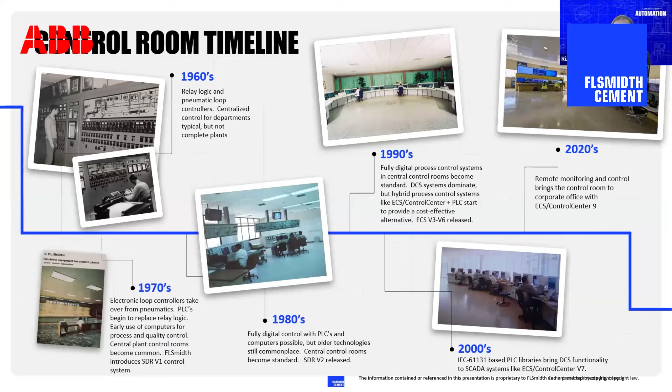So what is in it for us in Industry 4.0? We know that we need cost savings out of Industry 4.0. It's not just an implementation of some technologies, but what it can give and how the cement plant can benefit. The most important factor is cost saving, and quality must be improved. How can technology help improve quality, and how can we increase uptime, because even one unplanned shutdown can cost the plant a lot of money?

And it makes us less efficient. So we become more efficient by increasing uptime. Greater productivity is the most important thing: how to increase production with fewer resources than we have today. The ultimate aim is to reduce the environmental footprint. This is how the transformation from Industry 3.0 to 4.0 can happen, how these technologies can be adopted by the cement industry, and how we can help them adopt those technologies with ease. That's what the presentation is all about.

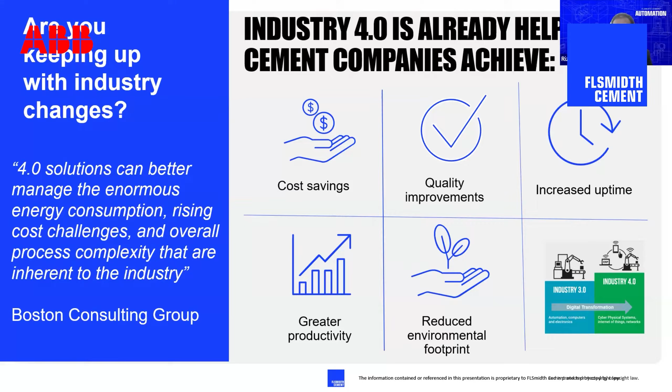For me, I've chosen two topics, production and efficiency. There are many tools available in the market, but we also need to set KPIs. If I'm looking at solutions in the market, what can they do for my plant? There has to be a KPI set, because I need to measure what I'm doing and how it is paying back to the cement plant. So there are some guidelines, like how my kiln production is going to improve, what fuel saving and what energy saving I'm talking about.

It can be to the specific areas. It could be VRM, it could be ball mill, it could be roller press, or it could also be kiln. But before we start the project, I think we need to have the KPI set, and then measure it against that.

Okay, this is the digital project I have implemented in my plant. Is it benefiting me? Are the returns what I'm looking for? How am I making progress on these returns, right? So that is the most important thing. So we set the guidelines, we set the KPIs, and then we start the digitalization projects in the cement plant.

So I've taken two topics, the two most important topics for any digitalization of the cement plant: the quality control and the optimization part of it. How they are linked, and how this can impact the whole cement process, right? The value chain is very important here when I'm talking about the quality control and the process optimization.

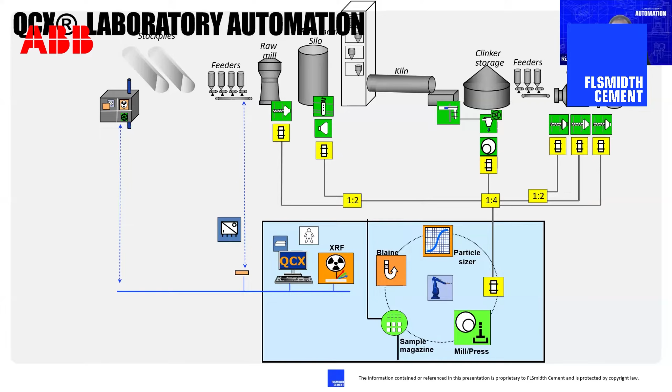So the QCX laboratory automation not only helps in having the right sample, but it also helps you with the safety part when it comes to the human, right? But where does the error come from? Is it from the sample collection, the sample preparation, or the analysis process? If you see the whole 100% chart, the sample collection is where the errors are happening, right? How the sample is collected, at what time it is collected, and how it is being processed.

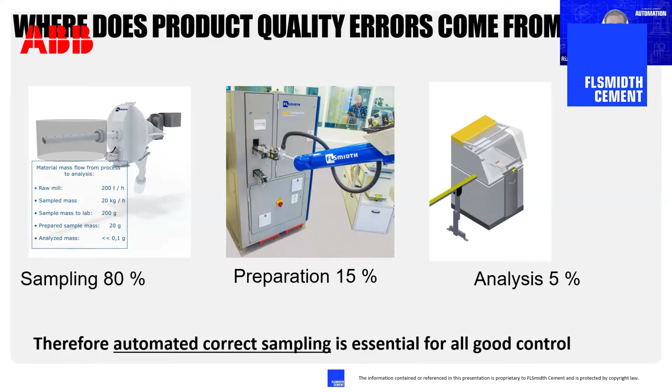So these are the important aspects of quality control, right? We invest a lot of money in the equipment, but if we don't have the right sample, then the whole process is not correct, right? To correct it, the sample is the point where it has to be automatically collected, and that's the reason why the QCX RoboLab plays a vital role when it comes to quality control.

Okay, now we have collected the sample. We also have the equipment invested to do the analysis. How to make auto correction, right? So it has to be in a closed loop. We have so many manual processes today. So as part of the digitalization, we need to make them automated, right? So the sample collection, then the analysis, and then the correction.

So once we have this analysis from the XRF or XRD, that has to be fed to software. That is where the QCX BlendExpert plays a vital role. It takes all those analyses and characteristics, and then the raw mix control is done automatically, right? Today these samples are collected manually, the analyses are done manually, and the feed set points are given manually. So if those ratio set points are corrected automatically, the quality part of it is done in a closed loop.

We know that the pyro process is critical, but what is feeding the pyro is the raw mix, right? If the raw mix is quality, then the output you get from the kiln is also quality, right? We keep doing the basic corrections in the kiln, but what we are feeding to the kiln is also most important, and that plays a vital role. So quality control is foremost if we really want to have an efficient kiln.

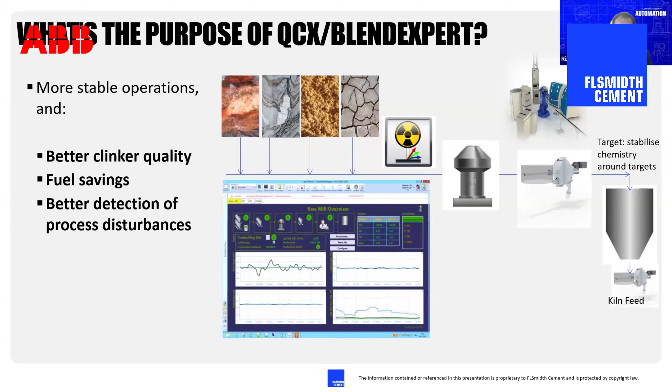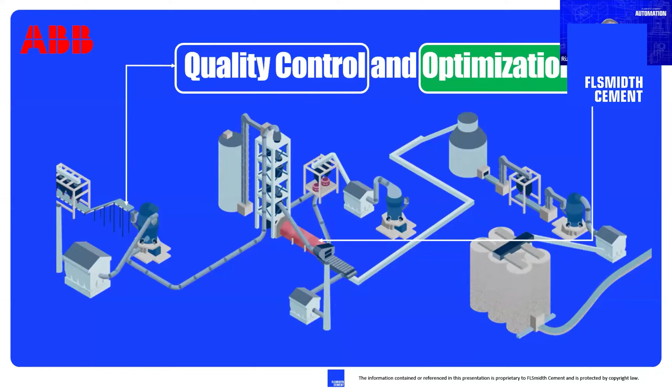So now I'm coming to the optimization part of it. Process optimization can never be avoided in today's date. With pyro being the critical part of the cement process, and having alternative fuel and WHRS as part of the pyro process, it makes it more critical in today's operation.

It is humanly impossible for an operator to run the cement plant efficiently, right? Yes, based on his experience, he can keep changing the set of parameters with the process changes, with alternate fuel, with the WHRS being placed. So the kiln has to be optimized, the kiln has to be efficient, but how much can the operator take, right?

So that is where the ECS/ProcessExpert, the advanced process control, helps the operator by becoming an assistant to the operator. It takes over from the operator, but I think you still need an operator. It will not replace the operator today, but that may happen in the future. As of today, you need an assistant to the operator, so the operator can work on other things, but changing the set point every second is humanly impossible.

So that is what the ECS/ProcessExpert does based on the various changes in the process. Because of the alternate fuel, changes happen in the process; because of the WHRS, the kind of changes and the kind of process instability happens, right? So you need to make those corrections immediately. That is what the process expert does.

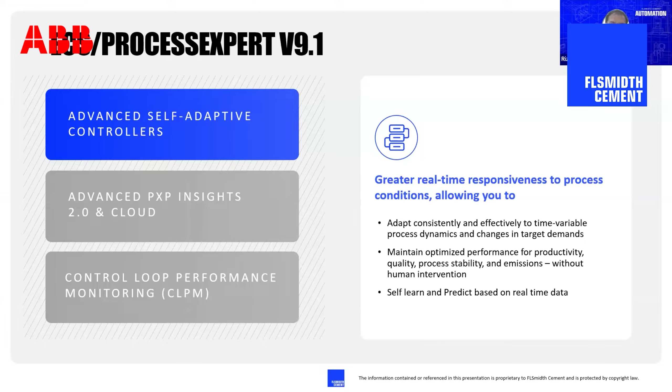With version 9.1, what we have launched, there is adaptive control, self-adaptive control. Whatever the dynamic changes in the process, it adjusts automatically, does the production control, and controls the plant, so it becomes an assistant to the operator. Because of this, there is stability to the process and efficiency to the process. At the same time we save energy, the electrical energy, and we tend to increase the production, like the KPIs we said in the beginning.

So okay, I'm implementing this digitalization in my plant, but in what way is it going to help me, on the quality part of it and also on the optimization part of it? When it comes to the kiln, the pyro process is becoming more complicated day by day with alternate fuel.

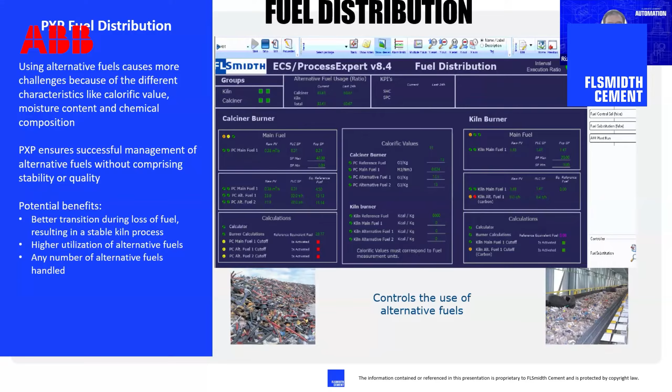Once we have the alternate fuel, the operator's job is to increase the usage of alternate fuel, right? So there are situations where the kiln really gets disturbed, and then he has to put the PXP into off mode. With self-adaptive control, it also helps increase the alternate fuel usage in the kiln and ensures that the process is stable.

As part of this process expert, the new version we have launched, we have also come up with an advisory mode where, when the kiln is disturbed, you don't have to put the complete PXP into off mode. You know where the disturbances are, for example the ID fan or the grate speed, wherever there are disturbances because of these process variations.

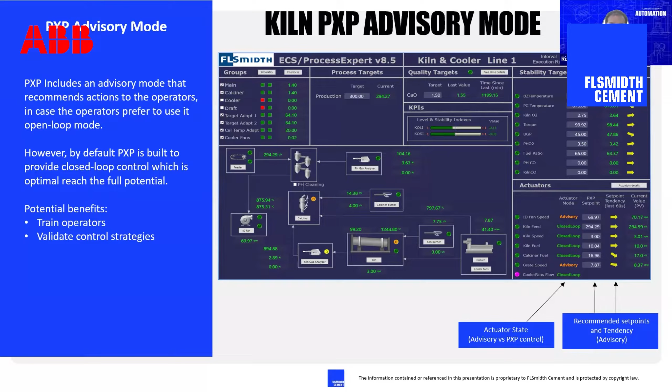Because of the process changes, you keep only those loops in manual mode, and the process expert continues to run in advisory mode, advising the operator how the process is behaving and what the set points should be. So process optimization cannot be avoided or overlooked in today's date. With so many variations and process disturbances in the kiln, the process expert, the advanced process control, does its job.

Once we have done this, we also need to know how my kiln is behaving, how my kiln is performing. That's the reason we have also launched the dashboards. There is a dashboard for sustainability, a dashboard for performance, and also a dashboard for benchmarking.

There are multiple lines today. You cannot avoid having multiple lines in production, right? When we have multiple lines, there also needs to be benchmarking: how is my kiln 1 performing, how is my kiln 2 performing with this advanced process control? That's the benchmarking. And how much improvement are we making? If the process expert run factor is 90%, what are my savings and what is my production increase?

If it is 80% because of the process disturbances, how are my performances? So those performance metrics need to be monitored, and then further improvements can be made. Okay, once it is installed, what is there further for further improvements? So

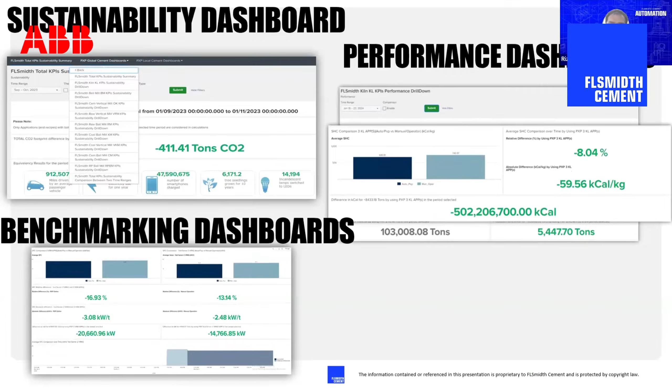the remote monitoring and optimization plays a vital role, right? We have been talking about remote operations, right? And now we are also thinking that once you have an integrated unit and then there is a grinding unit, can this grinding unit be controlled from the integrated unit? All those are going to come, right? And the advanced technologies are evolving towards that.

But before that, for example, once we implement these digital and advanced technologies into the cement plant, we need to monitor them, right? There has to be performance monitoring as it is needed. What are the fine corrections that need to be made based on the process changes? What are the alternate fuels you keep adding to the kiln, right? And how the WHR is performing.

So based on this, it requires fine tuning from time to time, and it requires remote support from time to time. So that is where the remote optimization helps to maintain the plant. And whenever there are some disturbances, whenever there are some changes to the process, we keep fine tuning them and put back the KPIs we had originally, right? It could be 3% saving, it could be 4% saving.

It all depends upon the plant, how it is being operated, and what we would like to be in the future, and what we would like to do with the plant once we have these advanced technologies implemented in this cement plant.

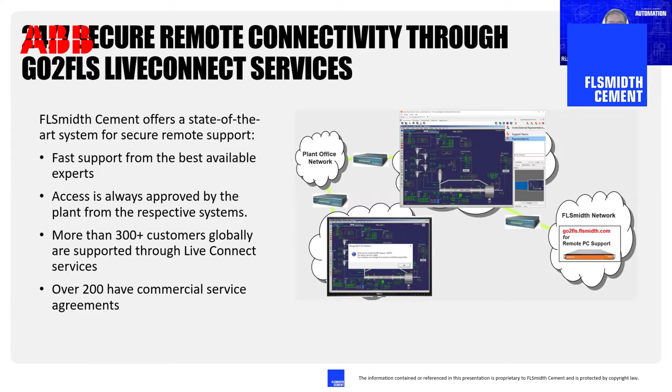Yeah. And then we also need to monitor them remotely, right? I think COVID has taught us that we cannot be disconnected from the plant. We need to be connected to the plant when the plant is performing. If it is not performing, why is it not performing, what are the KPIs to be watched, right? How the production is, how the energy savings are, where I am lacking, what improvements need to be made. So there is a SiteConnect app.

It is a mobile app. So with the mobile app, wherever you are in the world, you can monitor how my VRM is performing, how my kiln is performing. So this is also important, being connected as part of the digital tools, as part of the advanced technologies.

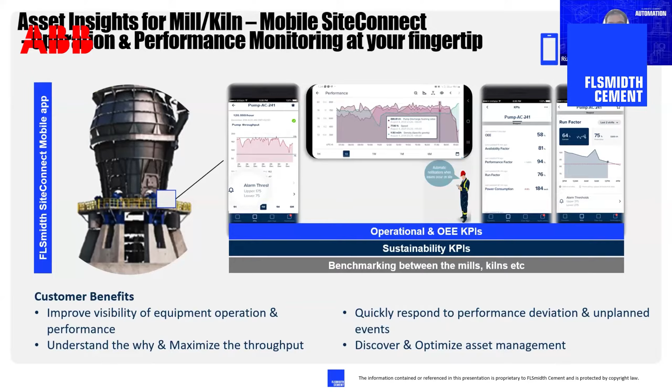Yeah, I'm done with the presentation. It was a quick one because of the time limitations, so excuse me for my speed talk. Thank you, Mr. Rizwan, it was an excellent presentation. Though it was quick, it was a very interesting one. And I believe there will be a lot more questions for you. We could already see some of them, but I think we'll take them towards the end. Yeah, sure. Thank you once again.

So coming back to the main agenda of today, that is the panel discussion. Before I hand over the virtual platform to our moderator, Dr. Hegde, let me introduce him and the other panelists for today's discussion. Dr. Hegde is a seasoned and accomplished professional with over 3 decades of expertise in the cement industry, spanning leadership roles in India and internationally, with an exceptional track record in transforming operations, driving innovations, and mentoring future leaders. He has held senior positions in cement organizations and is recognized globally as an authority in cement manufacturing, sustainability, and advanced concrete technologies.

Then we have Mr. Hemant Aiyer, who has over 25 years of industrial R&D experience in diverse verticals of advanced materials. He has published over 60 international journal papers and over 30 internal research publications, along with several patents and multiple technology development awards in different corporates. Dr. Aiyer has worked with many global organizations such as Tokyo Institute of Technology, Japan Science and Technology Corporation, General Electric, Crompton Greaves, Aditya Birla Group, Novo Vista Corp, etc. And then we have Dr. Raju Goyal.